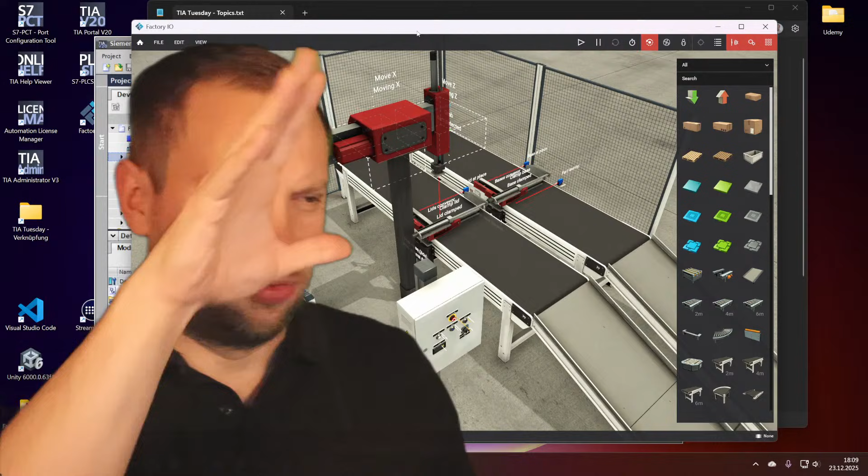I am not a closed loop control master, but this definitely sounds like - the question is, when you start up your controller, your output directly jumps to the max here, right? So your output is directly at a maximum value. If it starts at the maximum value, there could be many reasons, but the main one I could imagine...

So you have the behavior, right? You have two inputs - you have your set point and you have your feedback value, which I'll call FB or 'in'. Let's actually say 'in' there. I will be back with chat in a second, I will try to answer questions today, a little bit.

So now, depending on what you have set your controller to, my assumption is you have set it to a full PID, but the important part here would already be the P. For the beginning, if you start up, the only really relevant thing is the P. Of course the D as well. Try to turn off the D factor, which could break everything. But if you go slowly, slowly also means P and I mostly.

So let's see, if that is the case, and your output is at max from the beginning on, and then as soon as your input is higher than your set point, it starts dropping. Kind of the opposite behavior, right? It's kind of the opposite behavior.

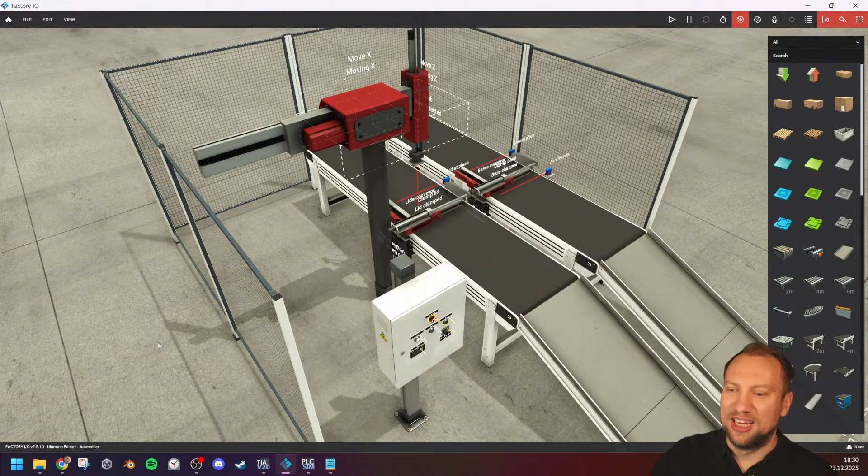Okay, shall we do some basic programming here? Let's go in there. I have this machine. Let's actually program a little bit of TIA today. It's just how would I approach a project? Maybe we can finish this thing today. What would I do? I will sit down for this, which I rarely do for TIA Tuesday - Tuesdays I rarely sit down. But if I'm just going to do a little bit of programming, I'm going to sit down.

Love from Bangladesh. Love back from Germany. Thanks for joining in. Hey Gordon, hi, how are you doing?

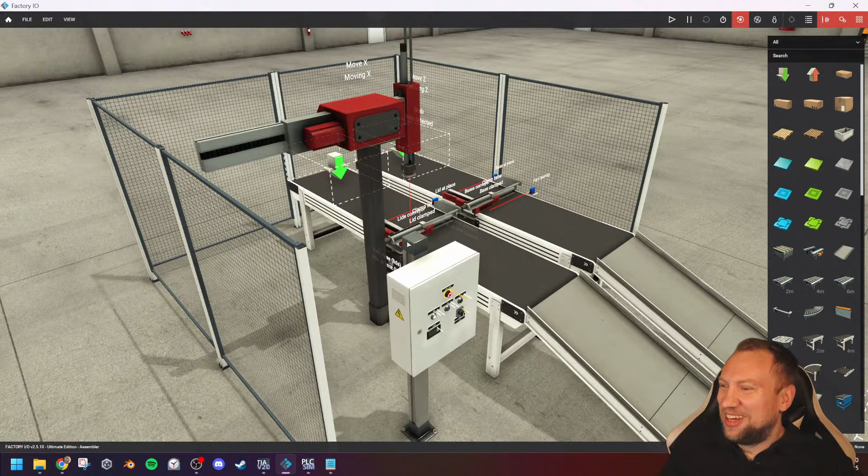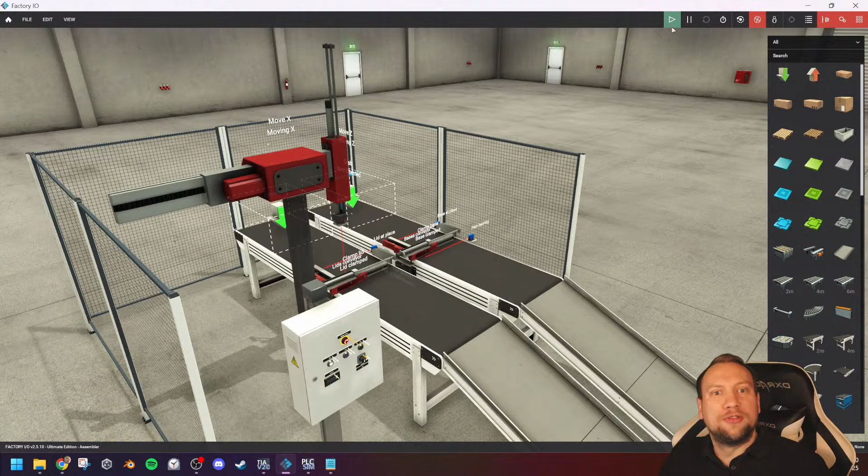So, just some chill programming. If you have questions, toss them in the chat. What I want to do is I want to have just this machine here, very simple. I don't even know what it does, I gotta admit. I literally don't know. I just open it. I think I've worked with this previously, but what does it do?

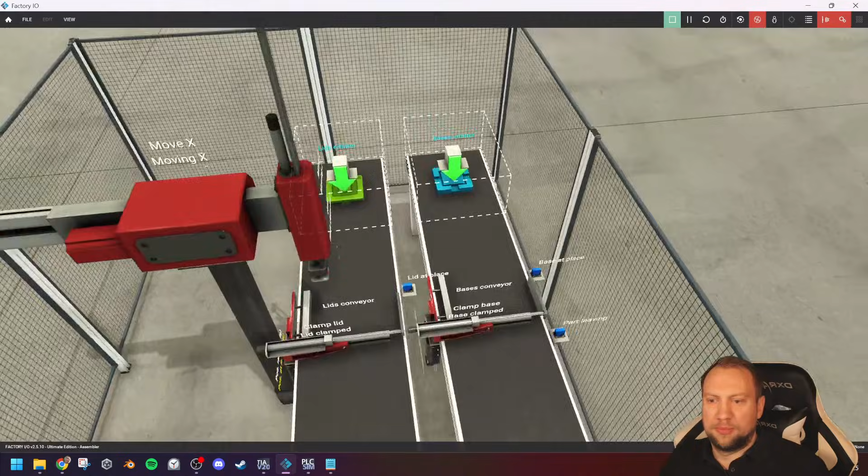Oh I see, so what it does is it has those tops, right? The top goes here, the bottom goes there, and the top needs to be put on the bottom. And then it needs to be transported all the way over here. Now one question that I have: why can this lift here? The top doesn't even - the clamp can be lifted, can it? I think it can be lifted. This is an unnecessary actuator here. But okay, I'll accept it.

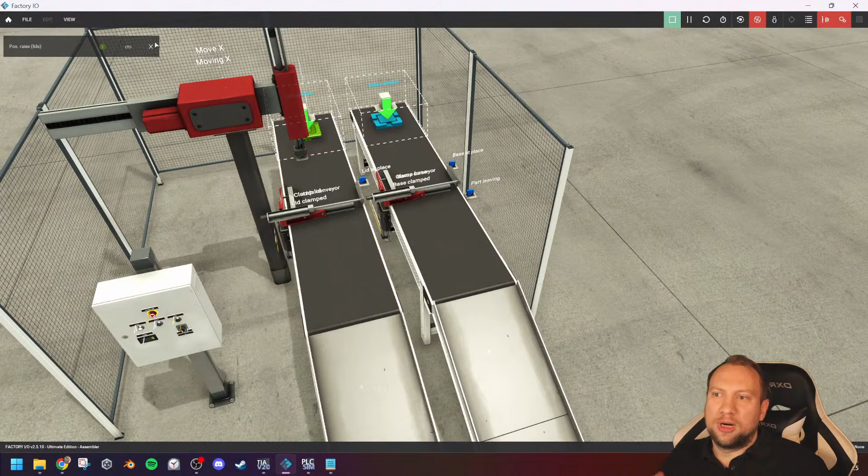So what would I do when it comes to programming? Well, I would first analyze the whole thing and then I would just go for it. Of course here for analyzing it, I would also have this PLC sim. I want to hook this up, and you see it has a couple of inputs, a couple of outputs. Maybe I can program the whole thing in a minute here. We've got an hour approximately, so I can definitely do this, hopefully.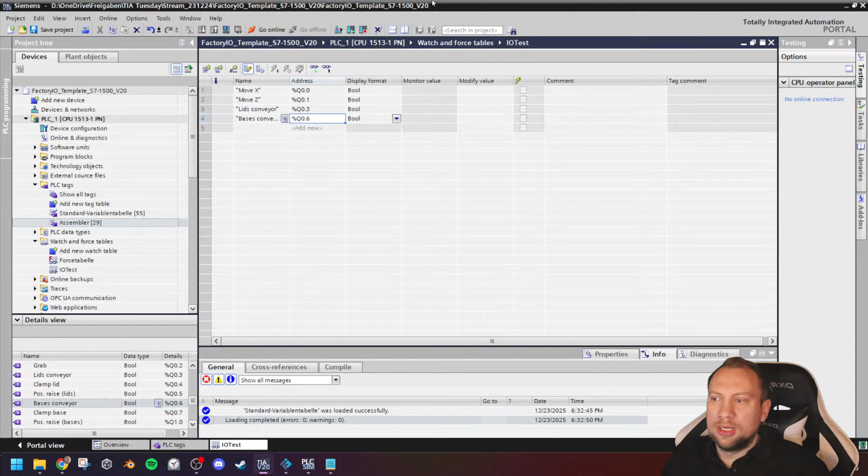Right, so I just have my IO list. I don't need to download anything, this is just on my PC. That's really a great thing about watch tables, they just sit on the PC, and if they work, they work. If everything works, no need to download.

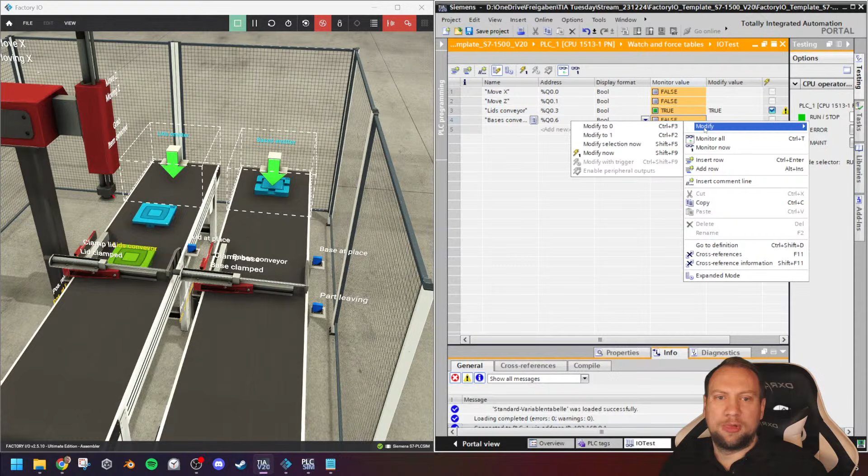So I can turn on and off things. My favorite way is very simple, just right mouse button, and let's see if something happens. So I do have my lids conveyor, let's turn that on, modify to true, and let's see if the connection works. Yep, seems to be good. Bases conveyor, yep, seems good. Right, so that works just fine.

Okay, first thing done, IO test. It's pretty much, this was just an output test, but the test succeeded.

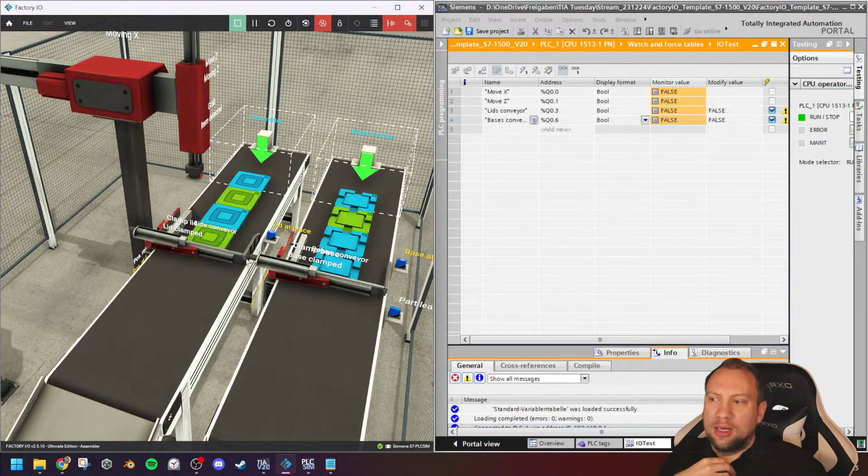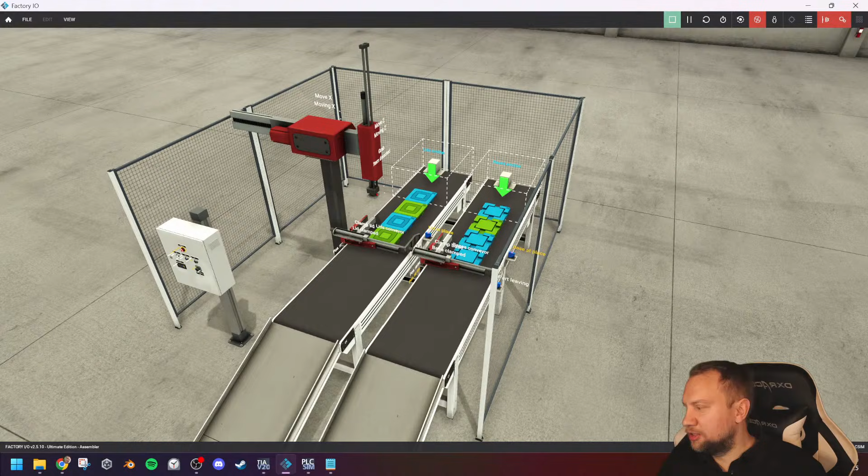Then the next thing that we would probably look at is how would we organize our system here, how would we structure our system? And for this, for structuring my system, I will do something that I haven't really talked about yet, but I will talk about now.

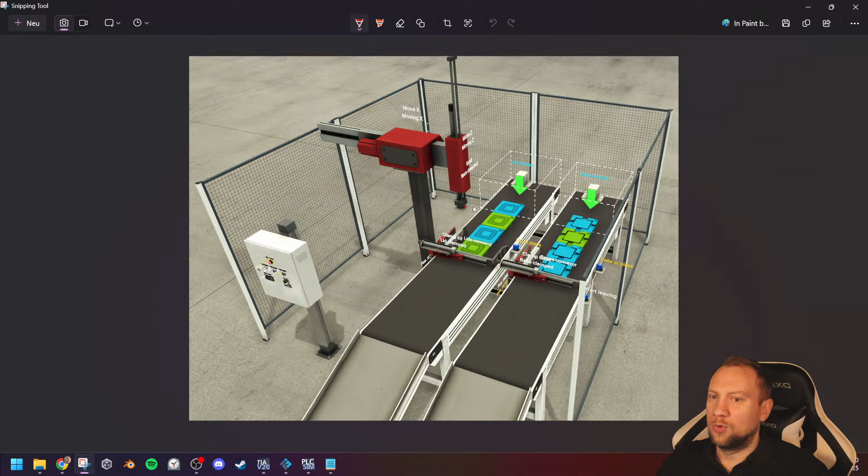JQ is new on the channel, has just discovered me and wants to ask what I'm doing. Is this a high level question, like what are you even doing? I understand it as probably for a job. As I said, today is more of an AMA, right, I'm going to discuss, talk to you, ask me anything. For those that don't know what AMA is, ask me anything. You can ask, of course. I am an instructor for all kinds of programming things, I'm a teacher, I would say. Yeah, that's it, pretty much. I do have my little YouTube corner here and such, but most of the time I do trainings, I teach. A lot of times, of course, TIA, but also other things.

Let's see, D worked in Masterdrives MC last week. I haven't worked with that, but it's good if it feels right.

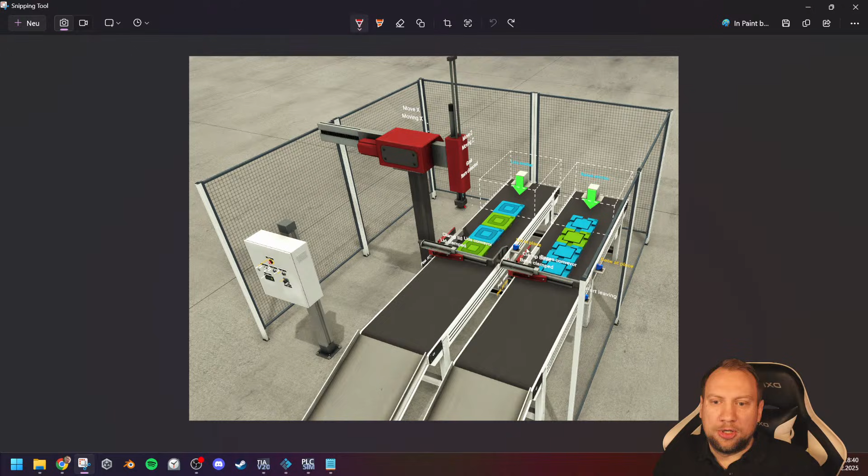That is fantastic. So now, what we can do is we can structure our system. And therefore, I will use some stuff that might be new here. So, for example, what we can structure, and I'm making this up right now. I know what I'm doing, but I'm making kind of the structure up here. So what I want to do is, we do have, for example, two conveyor belts, right? This conveyor belt, this conveyor belt, 1 and 2 conveyor belts. Now, what I will do with those is I'm going to have them in my own kind of structure. Right now, what they are is they are completely separate. Not just the conveyors are separate, but each component is treated as a separate component here in the system. So what I will be doing is I will have one tag that is conveyor 1 and one tag that is conveyor 2, which makes it much easier to work with the whole thing.

Mark asks if I'm a trainer for Siemens SITRAIN. I am self-employed, so strictly speaking, no, I am my own, but I do SITRAIN trainings, yes. Right, so if you ever go to a Siemens training, I might be your trainer. I've had this in the past quite a bit, that people went to a SITRAIN training and met me and they were like, hey, I know you. And it's always very awkward for me. So please, if you ever meet me in a training, of course say that, but be aware it is like, oh god. I've also had times where I was at the Siemens Training Center and people approached me like, can I take a picture? And I'm like, hey, of course, yes, why not, sure, take a picture. It's not awkward at all, I'm having fun, but it's, yeah. But officially, I do SITRAIN trainings, yes.

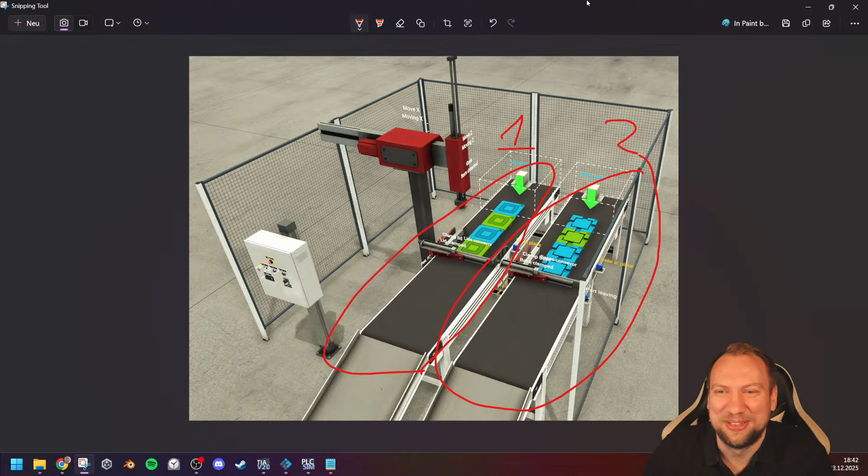So I want to have the structure of conveyors. Because we already have 2, I want to keep them together.

You would love to meet me. As I said, you can go to Siemens SITRAIN trainings, maybe I'll be there. Sometimes in person, sometimes online, who knows? I might meet all of you at some point.

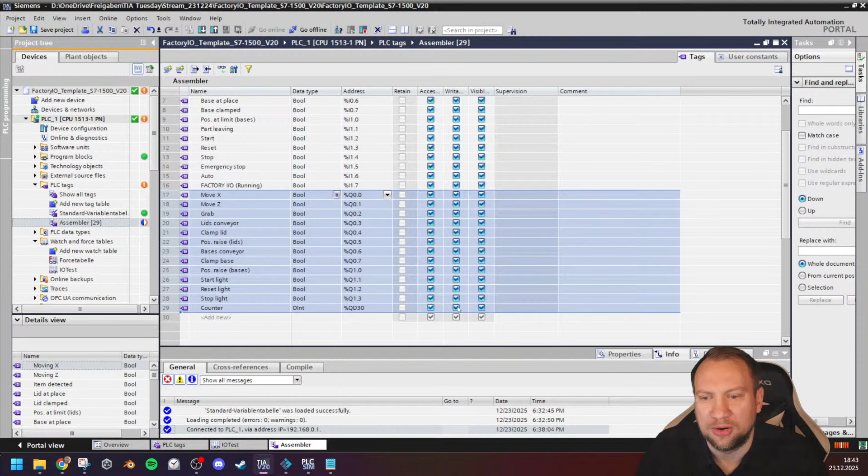Now what I would do is keep things together. I'll have my conveyor out 1 and conveyor out 2 combined. I don't know what is the conveyor here, this is kind of unorganized, and it really is. So let's make this session quite useful. In the best case this would be organized differently, and I will do so. Let's actually do something that makes much more sense.

For this, I'm going to change my configuration here, I will have more. Why do I have 12 outputs? If nothing works in the end, it's not about anything working today, it's fine if it doesn't. So let's actually do 3 output bytes. And I will slightly reorganize here.

What you would usually find is gaps in your addresses. So why would I want gaps in my addresses? Well, I want to keep together what belongs together. So I want to have everything that goes together for my base conveyor, together. The same I want to have for my other stuff, for the lids conveyor, for example.

And I will need to reorganize things here a little bit. Oh my goodness, this starts to be strange then. Lids conveyor, clamp lid, and pos raise lids. Right, so right now output byte 1 is for my lids conveyor, output byte 2 is for my bases conveyor.

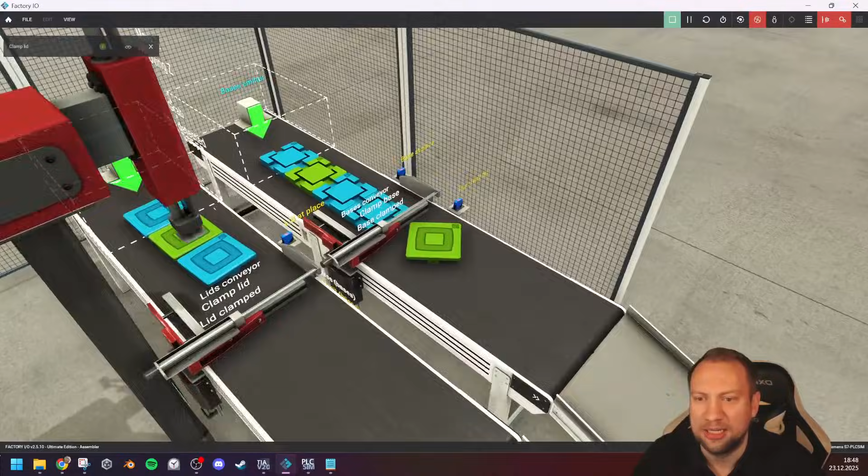Where is my IO list? So bases conveyor, part leaving. There we go. So organizing my IOs, it's important.

What does lid referring to? Lid is like the thing that goes on top. You have bases here on the right side and you have lids on the left side, right? And the lid goes on the base. That's the lid now.

So Anton asked if I'm planning to make training videos on drive simulation. Maybe a little bit, but not too much. I'm not a drives expert myself. So I know my competencies. Drives is not one of them.

Okay, now almost have everything sorted here. I will still reorganize a little bit. I will probably have to put on my headphones at some point because my girlfriend is in the kitchen and she's yelling right now. I'm like, oh God, I'm not going to help. I'm sorry, but no. But still I hear her cussing.

Can I please explain about Failsafe PLCs? So D asks, can I explain about Failsafe PLCs? As I said, today is more of an AMA session. Yes, very quick. Right, where is my paint?

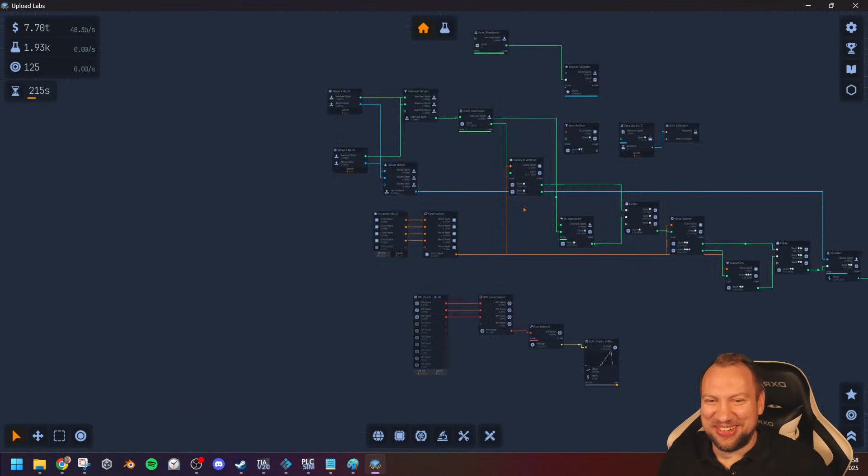So they get checksum verified, thank you very much for reminding me. I'm going to turn the sound off and have this running on my second screen. Mute everything please, thank you. There we go, very nice little game, I started with this today. That's why I mentioned it, how's it called, Upload Labs, very fun game.

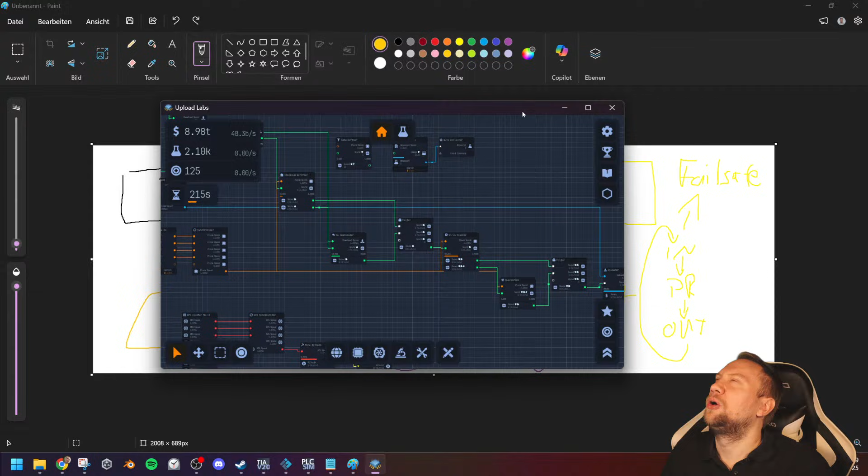Hans asked if TIA Portal works on Mac OS. Not as far as I know. I don't even know if you can run it on a virtual machine since it's hardware dependent. I forgot the framework it uses in the background, but it relies on Windows, so you cannot directly install it on Mac. Maybe you can find a workaround with some virtual machine magic, but I'm a Windows guy, so I don't know, I wouldn't recommend it. What I can officially say is that TIA Portal has no official distribution for Mac.

There we go. Okay, perfect. So I still have my I/O set up here, which I will have to re-import in a second.

Now that we talked about fail-safe hardware, there is an emergency stop input here. This emergency stop input is absolutely illegal in this way. This depends on country, but we talked about fail-safe. If I have something that I call emergency stop, and all it does is connect into a normal input, into a normal PLC, into my normally written program, and I use it in my program, it should turn off things in my program.

However, if I call it emergency stop, and I have it in my normal program and something fails - and this thing can fail, it's not a fail-safe setup, it's a normal thing that I called emergency stop - if this fails now and someone gets hurt in the process, I am 100% liable as a machine designer. I will probably serve some jail time, and for good reason, because I have said yes, the system uses emergency stop, but this is not an emergency stop.

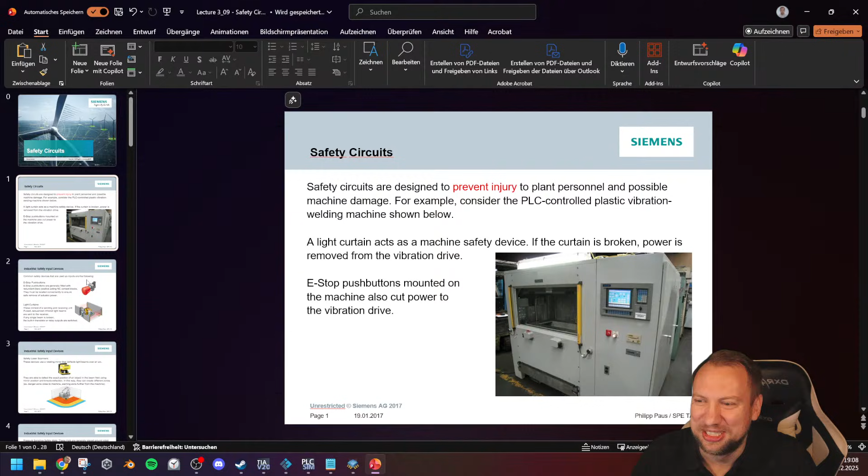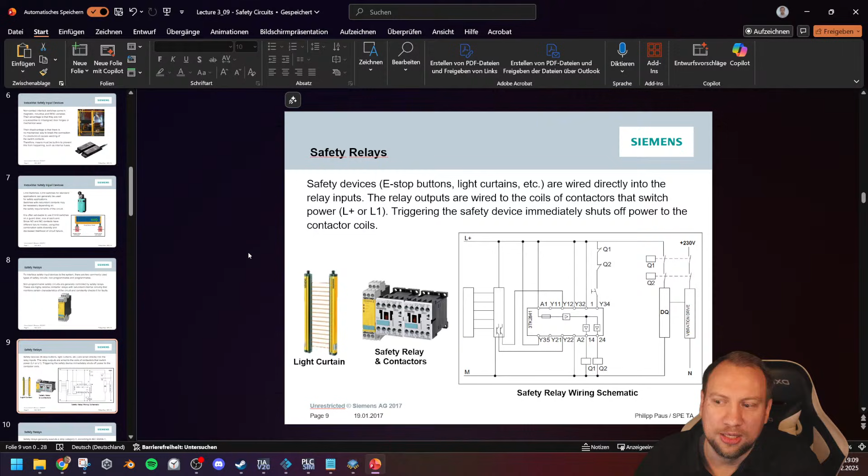So I do have a PowerPoint slide here that I used in official Siemens classes about safety hardware. We have many different safety hardwares, right? And the question was, hey, those are usually normally closed — you are correct, but you're also incorrect. You are correct in that safety hardware usually uses normally closed contacts.

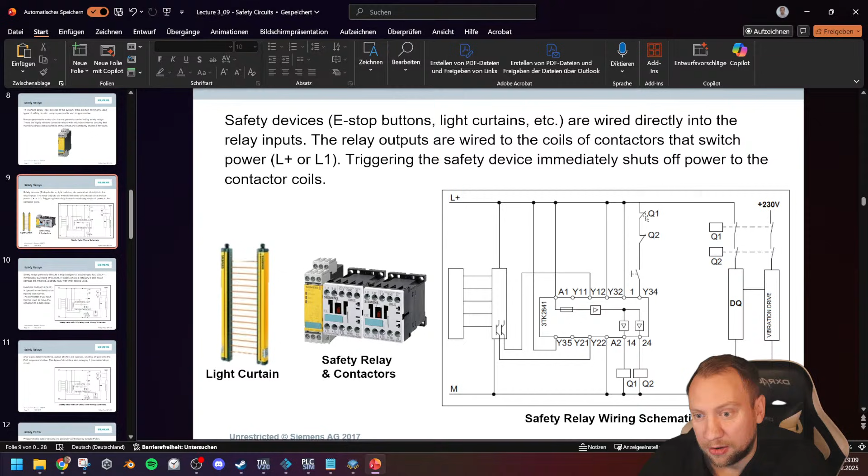However, that is not enough. If you have an emergency stop, for example, or any emergency hardware components, they are usually wired not like this, which you would expect. This is not an emergency stop — if you see the wiring here, electrical classes, I love it. You have the e-stop as normally closed in series here, and then it can turn stuff off. This is not an e-stop, this is a stop, stop category 0. If I press this, it turns off power, category 0.

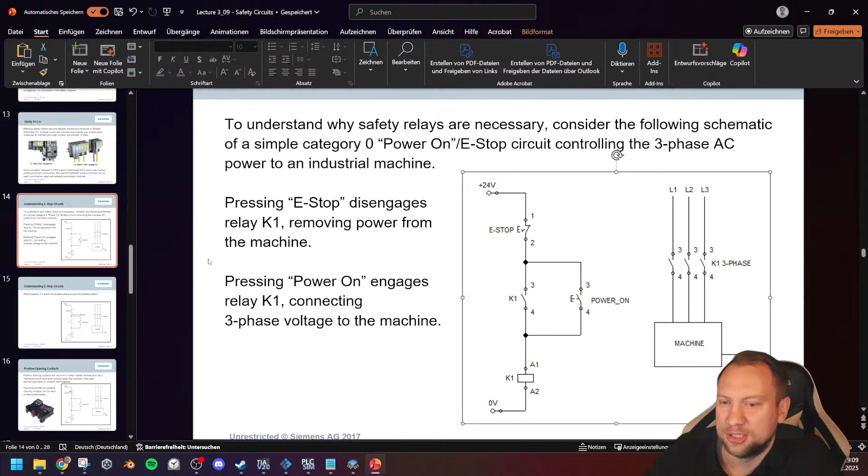What we would need to do with this is protect it against many different problems that could occur. The first problem is if this thing fails itself, physically, mechanically — so we have a second contact. If you hit an emergency stop, you're not disconnecting one contact, you're actually disconnecting two contacts, in series inside of the device itself. So even if the contact solders shut, or is broken off physically, you still have a redundant one.

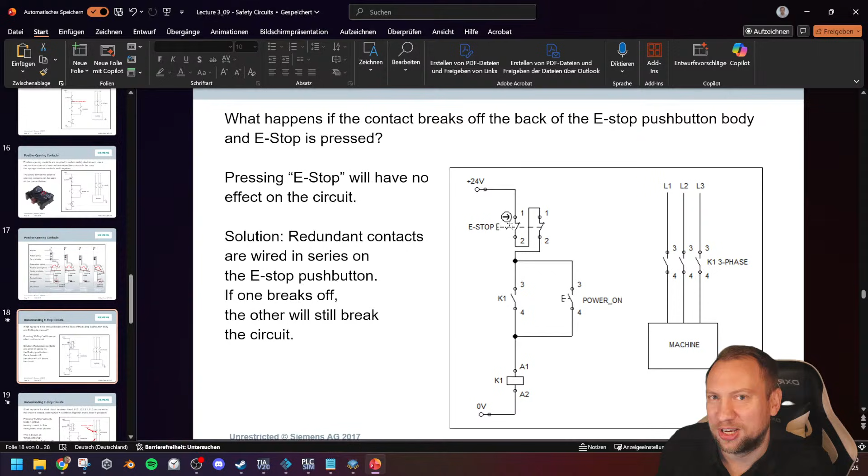Second thing is they are forced opening — if you press the button, it literally breaks open something on the inside. Emergency stop buttons are not for you to press, press, press, press — they're going to break at some point, highly not recommended because there's a lot of force acting inside of them. And then of course there are many more levels to emergency stop. You see how many iterations I have here on the same circuit to make it fail-safe. What you would do is use some fail-safe hardware or a fail-safe CPU that takes care of so many different problems we have when we talk about safety in machines. It is not just a push button, it's way, way, way more than that.

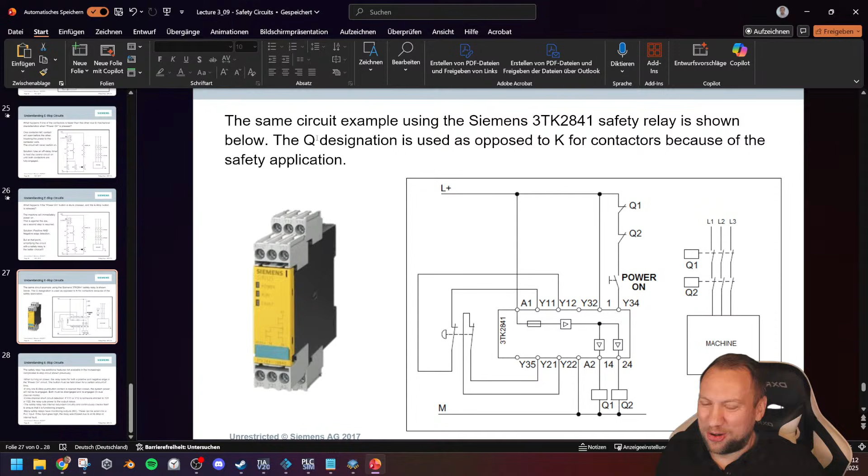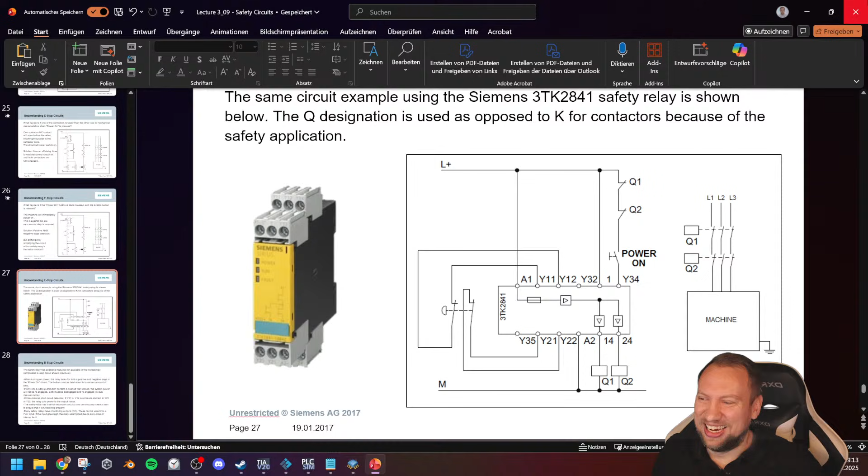Daryl asks if my PowerPoints are available. No, I can't use those in any other content. As I said, I have many things that I cannot share publicly. I'm probably not even supposed to show this, but it's been such a long time that I've used this, the school doesn't even exist anymore. So I'm closing this up.

Yusuf says, hello master, I'm an electrical engineer from Turkey, offer you my endless thanks. You're very, very welcome, thank you for watching them, thanks for enjoying them.

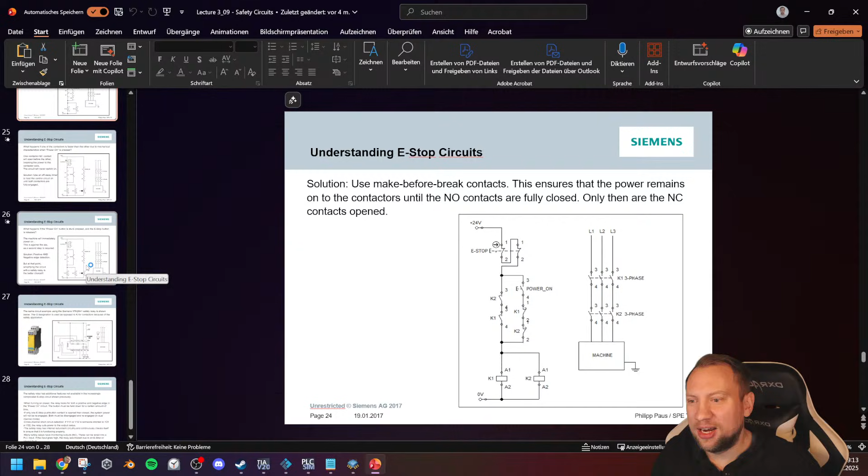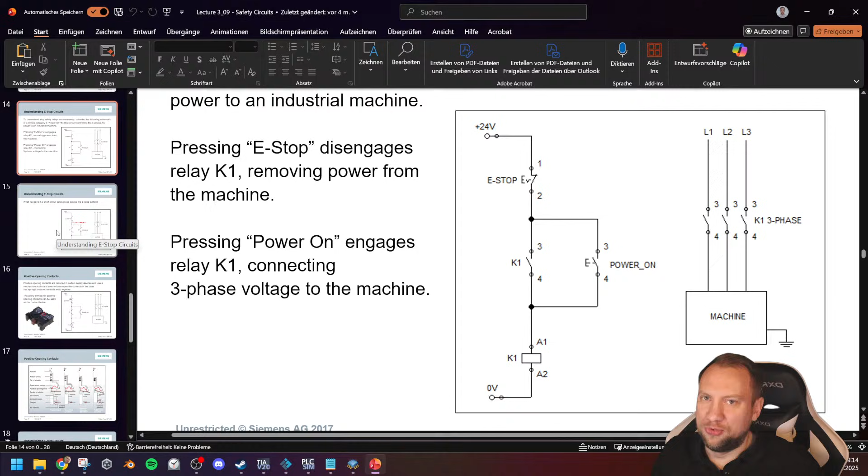So because I know wiring of the stop button is the same: if your stop button is wired the same way as an emergency stop button, it is not an emergency stop button. It really is as simple as that. An emergency stop button uses emergency stop circuits. You cannot have, well, as I said, this here is the first iteration of this. This here is a stop button. Electrically seen, if this button is activated, your power will switch off. If you really need to have an emergency stop circuit, the least you would have to do is implement many more safety mechanisms or use safety hardware. If you have an emergency stop button and you do not have emergency stop relays, you're kind of not doing it 100% correct. For those emergency stop relays, just search for emergency stop relays and those things will come up.

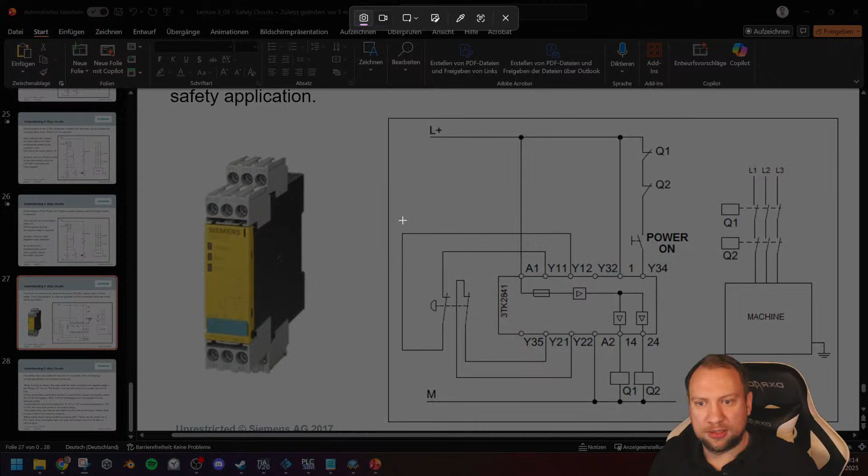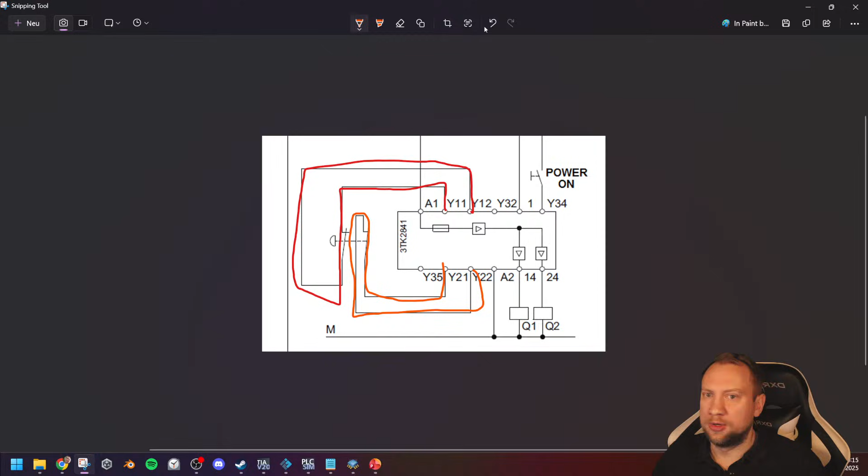Because an e-stop as well, if I look at this, so this is how the e-stop is wired here. It has two circuits, this one, and this is just an example. Those two circuits are permanently monitored for a short circuit, for error currents, for ground fault indications, for clamping of those lines. So even if those wires are clamped a little bit, the thing will shut off. That is what an emergency stop is. Those wires are so extremely protected by this device, they are wired into this device. Your emergency stop is not a normal stop button, by far, right? By far it's not. If it is a normal stop button, you, at least in Germany, would be liable.

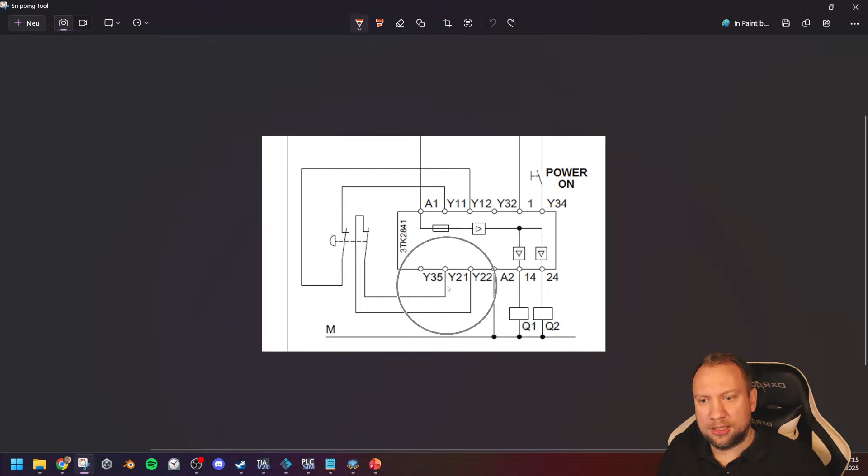If Alexander asked whether it does exist as an input to your PLC, it depends on your program. A lot of those things have a feedback. Usually this feedback, I would not say the feedback goes to your PLC from the button itself. The feedback comes from your emergency stop relay system. So this one has an output to connect to your PLC. So you would not have the emergency stop button, but you would have the emergency relay system as an input.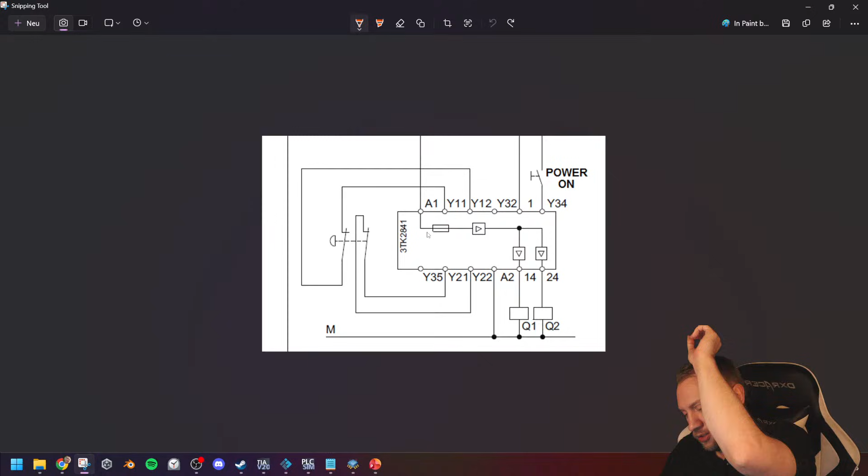Kapal also says, yes, it's also a control mix between channel A and B. Yes, yes, there is a lot of things going on. Emergency stop is a huge topic in itself. But of course, this could have an impact, like if we press this, usually your PLC program would react to this with an input. But that's your standard program. That would be a standard program on one side, but your failsafe program, this stuff, it's not even a program, right? This right now is literally hardware.

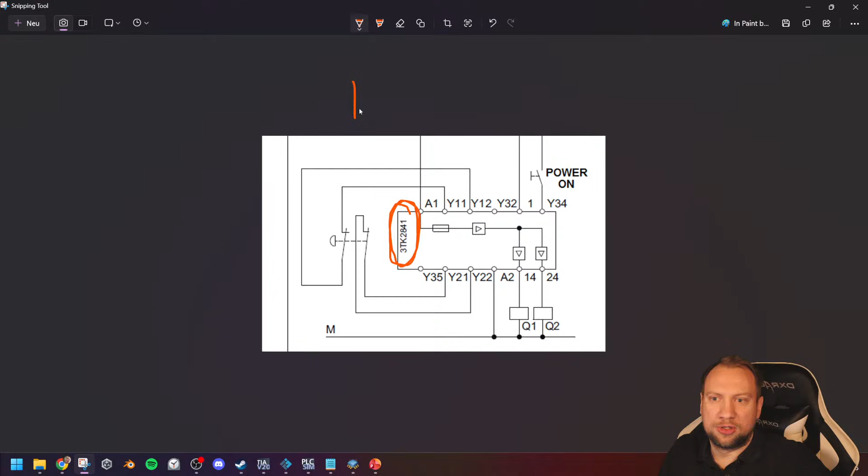Does an addressable safety relay exist? Yes, Ramdane, there are many different relays. There are even safety relays that you would connect through Profinet. There is a whole topic about this called Profisafe.

Now I love it that this is now a class about safety, which is an Ask Me Anything session today. So Profisafe itself, right?

You have Profinet. Imagine your Profinet network is slow, or your Ethernet network is slow. There is a delay, maybe 10 milliseconds, maybe 30, maybe 100 milliseconds, but there is a delay. Which, of course, if you have a safety application, it's not safety anymore. You cannot send safety information through a normal network, also not through a normal Profinet network. That is not allowed by law. So if you have a safety application, you cannot use normal networking stuff.

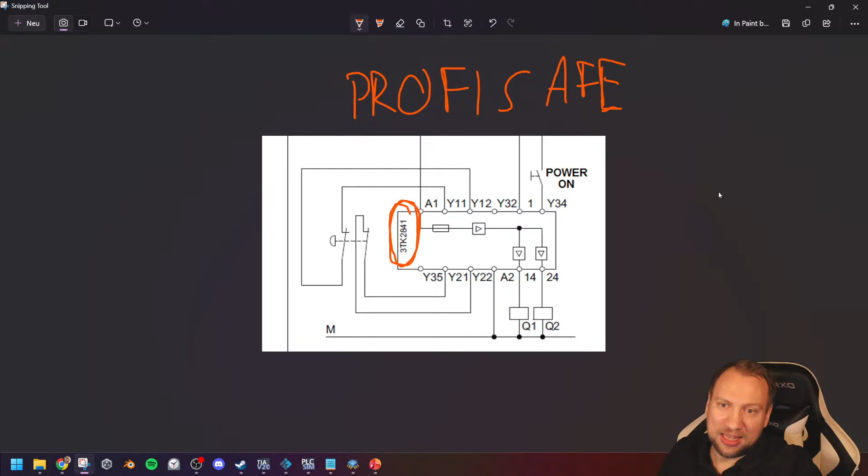What you can do, though, is use specialized hardware, which is Profisafe hardware. Profisafe hardware uses Profinet, and you can connect things like an emergency stop through Profinet, but you have to use the Profisafe protocol for it, which is very difficult. It's a topic in itself. Which is also like addressable safety relay.

That's how I got there. Yes, addressable, yes, but you will have to use different standards. If you have a Profinet network and you want to connect a safety relay or an emergency stop in your Profinet network, you have to use Profisafe. Or it's not an emergency stop anymore. You will still say, hey, I have an emergency stop, but if you're using normal Profinet, you do not have a real emergency stop anymore. You have a glorified stop button, but you don't have a real emergency stop. If you have a real emergency stop, addressable through networks, Profisafe is the idea here.

Someone says they have problems with installing TIA Portal on Windows 11. Does anyone have that issue? Are you installing it on Windows 11 Home or Professional? I know that there are many problems with the Home edition of Windows 11.

I also had some problems with TIA version 20 some time ago. Try updating your Windows, that might help. But if it's Home Edition... oh, it's Professional. Professional should not have a problem at all, should be fine. Maybe you have to run the installation in administrator mode - that's what I usually have to do. The problem I have sometimes is admin mode is not active. It can work on Home Edition, but on Pro it definitely works. Strange, try in administrator mode.

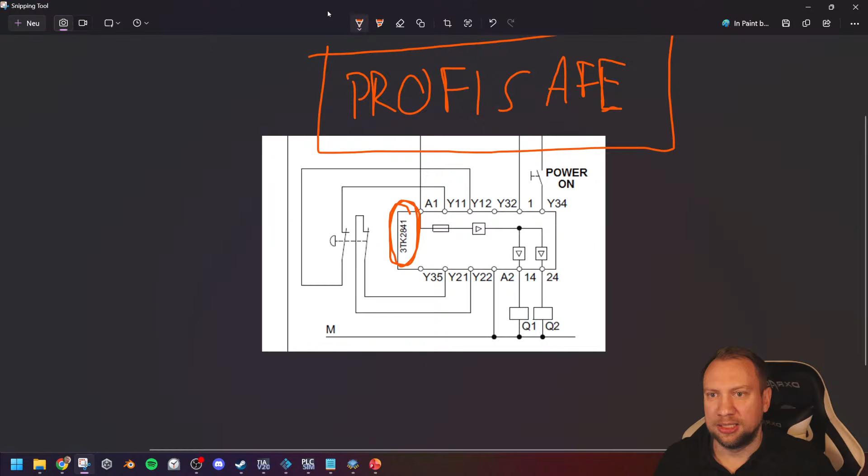Oh, that is actually a simple question, a simple answer there, D. It's the same reason. So basically D asks, usually those are normally closed - why are they normally closed? Well, not simple, but the answer is here. Let me make a new paint canvas. Do I have paint still open? No, does someone see paint? No paint. Right, so why is your safety stuff always normally closed? It's actually quite simple. If you have a push button...

Go safe, not cheap, yeah, that's the thing. A lot of people go cheap, and maybe nothing happens in 40 years, which I wish for everyone, but safety is like you're paying for the one moment where something goes wrong.

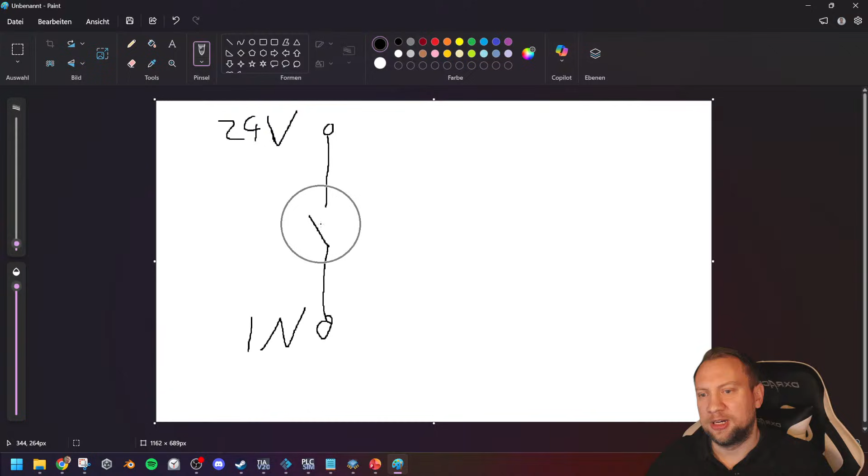So, very simple thing here. This is now a short, this is your input, this is your PLC in. Now if you press this button - and I'm using the German annotation, there's different things - this is a push button for me. If you press this, this thing will be activated, and now it is closed, and now your input will read 24 volts, right?

Now why would you use a normally closed instead? Imagine a wire breaks, there is an open wire here, this wire is now broken. So even if you press the button, what is your PLC going to read? The button is not pressed. So the PLC cannot differentiate between pressing a button and not pressing a button anymore for a normally open contact. So normally open, the button will just count as not pressed the whole time, even if you press it. Now if you have a stop button and you have a broken wire, how should the system react?

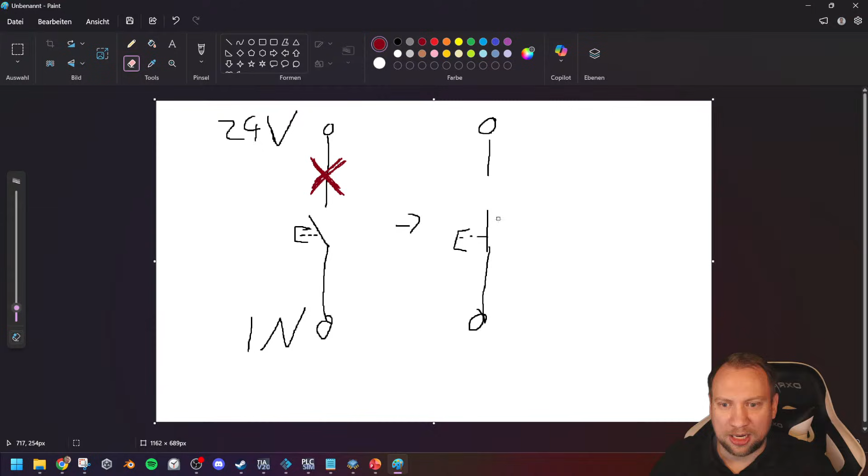The system for a stop button should react the opposite for a start button. For the start button, the system should react that the button is not pressed. Don't start, don't start, don't start - even if you press the button, it's not going to start, right? Now if you have a normally closed... and now we are kind of in the basics there, but that's perfect, right? As I said, I'm going through questions there.

Now if you have an NC, why would you have an NC, which looks like this for me? Now for an NC, if you press the button, it's going to open up. Or if the wire is broken, the system will think that the button is pressed, which you prefer for a stop button. For a stop button, if a wire is broken, it will think that the button is pressed. That's as simple as it is. That's why we have it - in case of a broken wire.

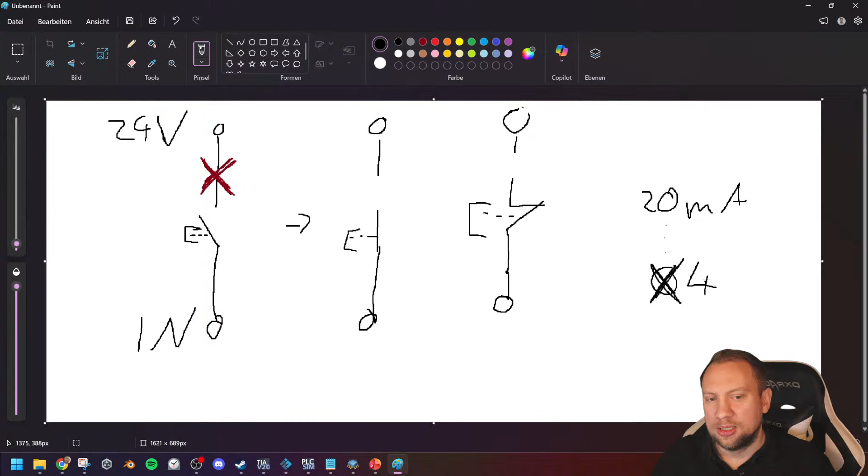The same goes for your analog stuff. That is also why most analog inputs do not go from 0 to 20 milliamps - you cannot detect a broken wire on 0 to 20 milliamps. Usually your analog inputs will go from 4 to 20 milliamps. So in case of a broken wire, the module will detect we have 0 milliamps, meaning we are broken. That is why you have this kind of 4 there. Yeah, we typically call this failsafe wiring. Exactly, it's failsafe wiring.

Yeah, exactly, that's the whole thing. Yeah, thank you very much. Yeah, in different languages even.

What is an automation engineer's salary in Germany, Ahmed asks. Good question, I don't know, I'm self-employed. I could tell you how much money I make, but I will not. In Germany we don't talk about money too much, which is wrong - I would say that is wrong in our society. But yeah, now you understand. You're very welcome. Perfect, then I have made my good deed of the day.

Yeah. I will not tell you how much I make.

It depends on many things, but I would say the hourly wage could be approximately 100 euros or so. If you would ask me to help with a project, I would probably take around 150 to 200 euros, which sounds a lot per hour. But I'm self-employed, that would include my manager, that would include my taxes, the income tax, and so on. So that's not what I would be getting.

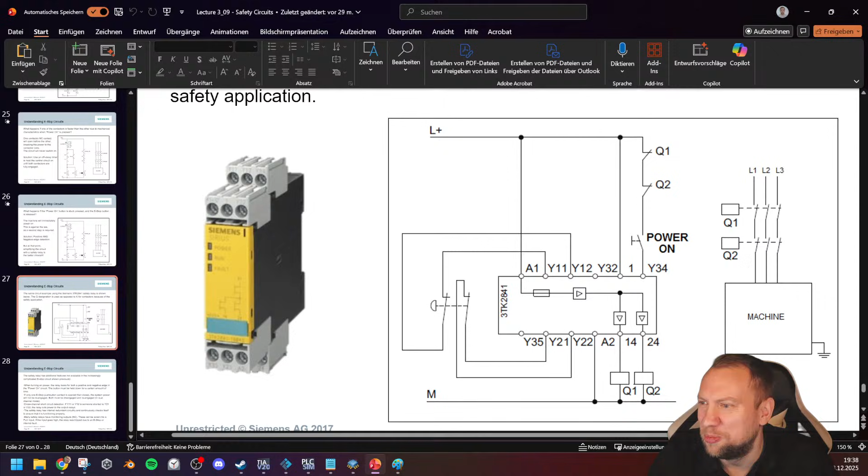Why can't we use OPC-UA with VFDs like Profibus, Profinet, or Modbus? Probably in the future we can, but right now that's just not how VFDs are set up, they use their Profi Drive protocol. OPC-UA is still fresh, it can probably be set up to work with a VFD, but not that I've seen it.

Do I plan on making a playlist about motion control? I think I have a motion control playlist, but inside TIA portal.

Are chemical plants rather DCS controlled than PLCs? Depends, but if you have chemical control plants, you would probably go with an S7-400, not TIA portal but PCS Neo systems, more process control systems, but can be PLCs as well.

Jose says there are PLC programmers in the US that make only $40. Depends, there's a whole range, right? As I said, especially as an entry, I would take probably 150 or 200 euros, because I act as a company. What I mean is, what you pay someone to do, you're usually not paying one person. If you're a company with an employee, that employee gets paid an hourly wage, but if you need a company to do something for you, they have an engineer, but they also have the whole overhead costs you have to pay for, so you're paying way more. Probably an engineer hour is like 150 euros. What does an engineer hour cost?

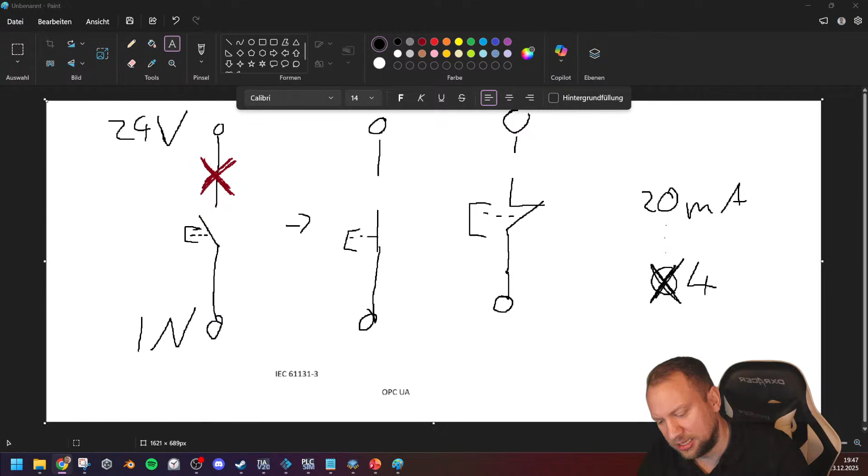Where can I get a job as a PLC software engineer with C++? I would look up on Google, on Monster - we have many websites. I think in Germany the most famous websites for getting jobs are Stepstone. My recommendation is I would look up on Stepstone, there are a lot of jobs there. That's in Germany, I can only speak for German - Stepstone is a German website. Then we have Monster.

Monster or Jobware - did they change the name? They probably did. No, Monster is still there, Monster for jobs. And then there's what is very powerful - it's actually LinkedIn. Through LinkedIn you can find a lot of jobs. In Germany this is the official place where a lot of professionals search for jobs - it's your social network for jobs, more I would say. Those would be my three sources: Stepstone, LinkedIn, and Monster.

I'm not using it too much myself, I'm not searching for work too much. I do have a lot of industrial contacts - personally I have different sources, but as a newbie, that's what I would try to do.

That was not correct - it said my IP, but it tried to dox me, that was not correct. I love the internet, how it never really works.

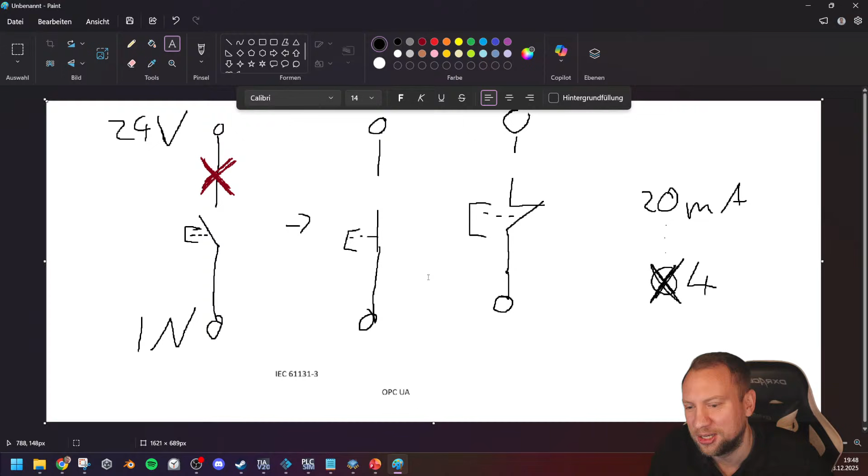Can HMI also read emails and do something in the PLC? Yes, Masood - PLCs have an email feature which you can use, and you can also connect that to your PLC in your network. Hey, I haven't used that.

Now it's been almost 2 hours and I've just been talking. This is fun, this is great actually, just talking for now. That's what I planned for today, right?

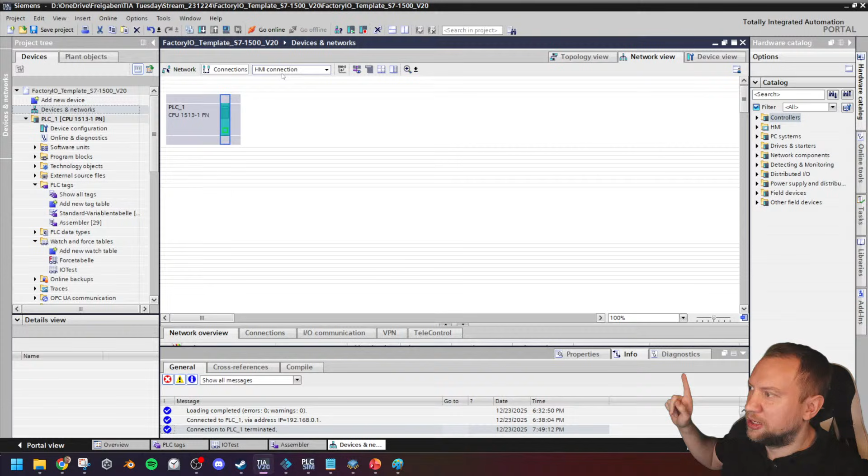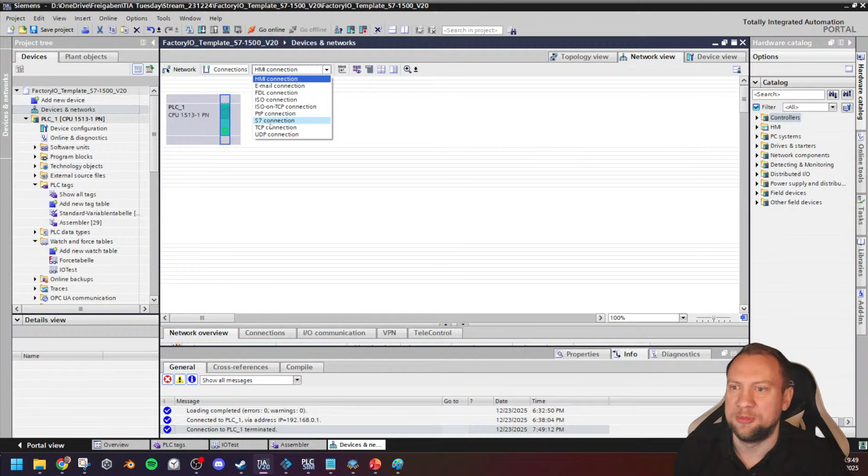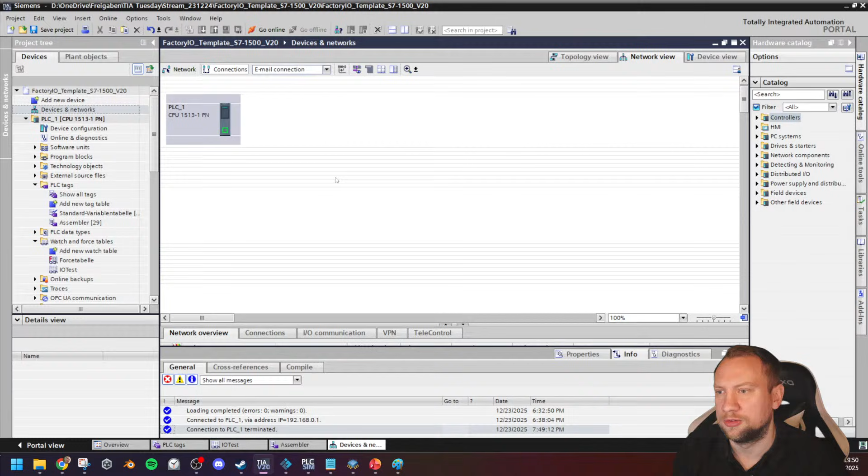Now who asked - Mahmoud, I think, right? Or no, Masood asked there. You see this - if you have a PLC, it has connections, there is even an email connection. You can set up easily with TIA Portal a so-called email connection to a server, and the PLC can then work with emails in the same way an HMI also can. I can't show how to set this up right now, but yes, this feature exists and isn't too difficult. By the way, the same goes for PLC connection, which might be an S7 connection for example - or maybe TCP or UDP connection, but those are for data connection. Then you have HMI email connection, which you can set up for HMIs and for servers, not for PLCs directly. For PLCs you would need the program block - there is a program block for email. I haven't used it, but I know it exists.

Technology communication - is there something like a mail server? Web server is not a mail server. Others? Modbus, communication processors. Wasn't there like an email function? Send email, receive email, stuff you can do, but I haven't done that. But I know it can be done.

Summer asks, can I work as an automation engineer in Germany without speaking German? I don't know the job landscape in Germany too well right now. I would say it would be difficult, especially as an engineer. I think it is still very important that you do stuff in German, for many reasons. One big reason is that all the documentation, everything has to be in German.

We have laws, we have regulations. There's also the question from Jose asking, do German automation companies hire foreign workers outside of Germany? Yes, definitely they do. They hire staff, but it's difficult for me to say. I know it happens, I know there are sometimes jobs out there. For me, I'm in a different position, so I can't say too much. It is difficult, that's what I can say. Definitely difficult. Future says no lol. I don't know to what, but that's okay.

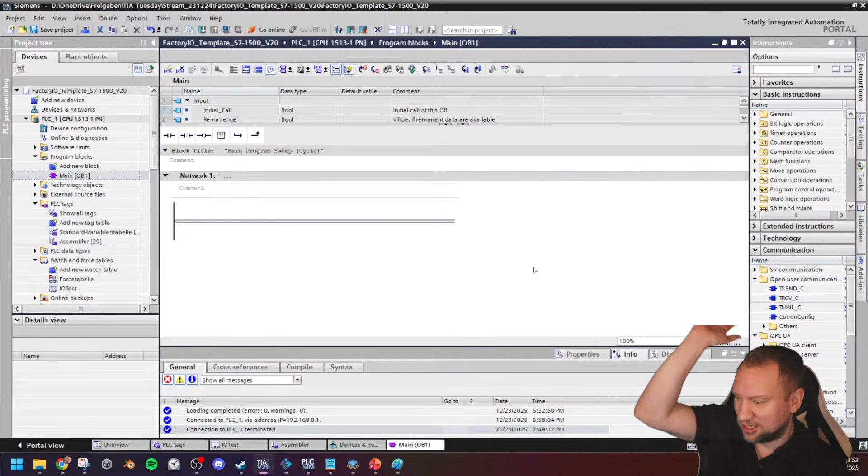Pepper asked, what is the tough part about WinCC Unified in comparison to the legacy system? The tough part for me with WinCC Unified is that way more is with scripting. You will do way more like this because it is web, it's all on web servers, it's all website stuff. You will do much more scripting with like JavaScript and such, which I don't have too much experience in. My girlfriend is way better with this, she does web stuff all day long, she's very good with this, and whenever I have issues with websites she can help. But that's what WinCC Unified kind of is, it's more of a web-based, language-based stuff, which isn't too complex. It's integrated quite well, but that would be my biggest problem with it.

Nima asked, do I work with Siemens? I currently only work with Siemens PLCs. I have the plan to get into others, but that's how life is, we always plan. So, specialize in Siemens.

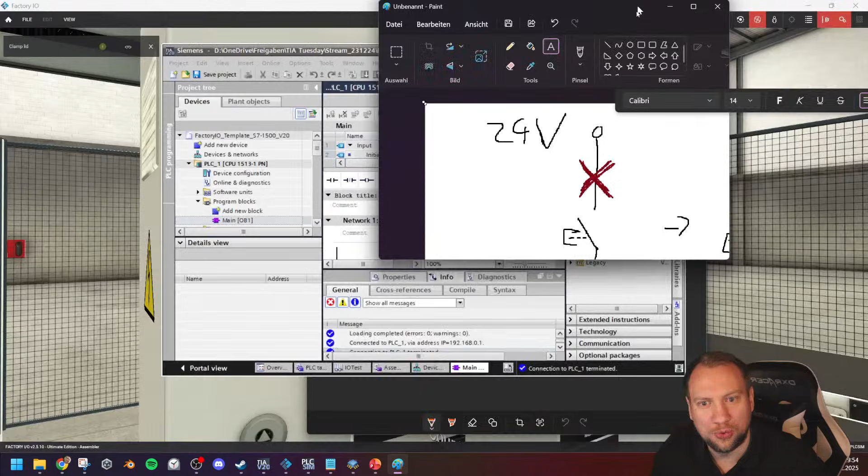But for migration, Ramdane, I can share another link - and this one, whew, I haven't done any programming, fantastic. For the link, wait, let me give you another link, it might take a second. Go on with the chat, I will be back with you in a second here.

Is that English or German? That's even English, look at this. I'm going to give you another free link, this free link that I'm giving you now. Sorry, I'll be back with you in a second there, but Ramdane had the question there.

For migration, this link that I gave you is TIA Portal, an overview of the most important documents and links for the controller. This gives you an overview, and you see there is one big tab here called migration, that's how I got to it. There is definitely like a migration from this controller to that controller or so, there's migration tools, especially for TIA Portal. There is the TIA migration tool, which I can recommend. I haven't used it in some longer time, but still this stuff should help. There's so many different migrations that are possible, but that's the direction I would push you.

What do I think about Siemens AX? I don't like AI stuff too much yet. It is powerful, and automatic code generation will take over in the future, but we'll see. Don't like it yet, but I will have to be prepared for it.

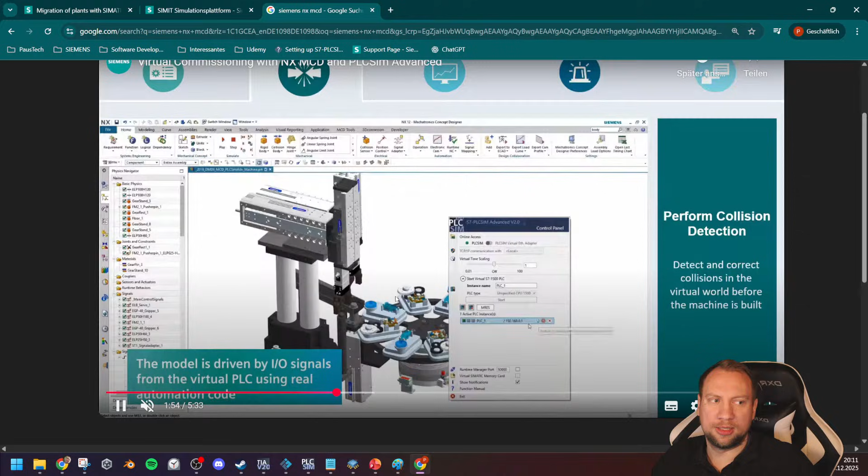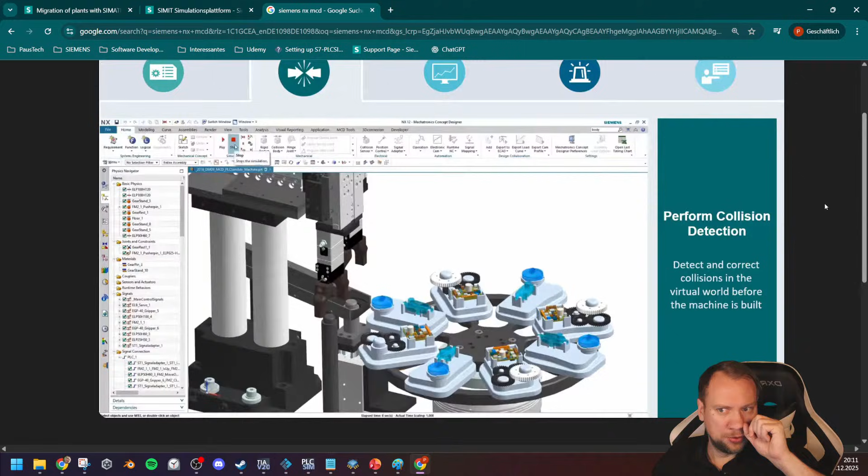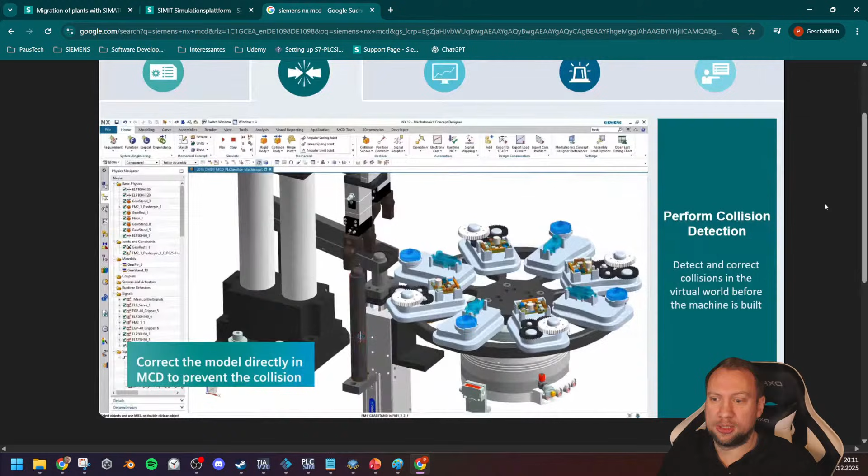I think most industry doesn't need it. It's just a solution to problems that do exist, yes, but in most cases where this can be used, or where people want to use it, it creates more costs than anything else. It is good, virtual commissioning is cool and it definitely is good, but most places I wouldn't recommend it. If you have millions to spare, go for it, perfect for virtual commissioning and stuff. But that's only if you really want to optimize on a very, very deep level.

Yeah, there are advantages, but it's very high level. Too expensive, exactly what I mean. It's nice tools, but too expensive. Siemens has invested billions into those topics to make advancements, and it's good. It has made a lot of advancement and become cheaper, but it still depends. I'm not a business person, but from the business side, it has huge investment and usually not too much return on that investment. From my perspective, but I'm not an expert.

I wouldn't use it, simple as that. I wouldn't use it. I would trust my engineers that they know what they're doing. If it doesn't work in the end, yeah, we'll find a way.

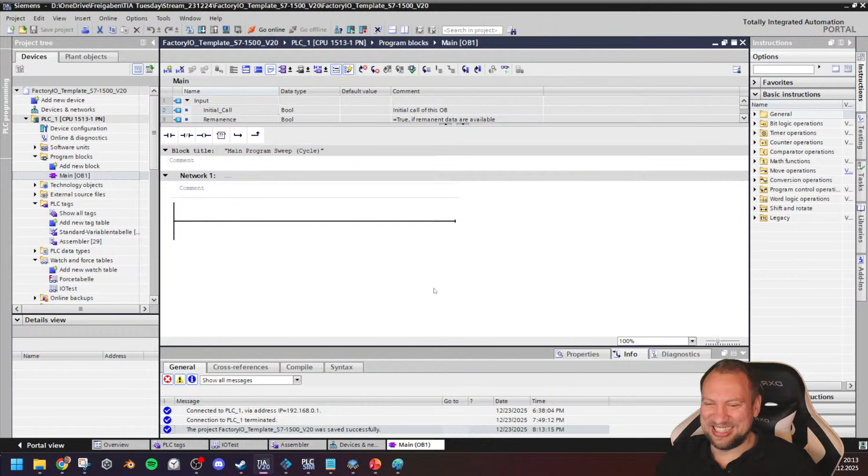There you go, perfect. Look at how much TIA Portal we've done today. Oh god, this was really an Ask Me Anything, and it's now 2 hours already, and I like to keep those streams to 2 hours. Yeah, we haven't done much on the programming side here. Great, I love that I have set this up. I have my IOs, I have kind of started with this, but we didn't finish anything.

But this is good, I really enjoyed this as well. It was more of a like... And I'm not gonna go much above the 2 hours. I didn't think even I would go for 2 hours today because it's so close to Christmas now. But I will now also start fading out here. We haven't done programming today, I'm sorry, but I think this was good. This was like solving a lot of questions, a lot of interaction here.

Thank you very much, really enjoyed reading your questions and answering them as good as I can. You realize I'm also not an expert in everything, no one can be an expert in everything. I try to be up to date with all my stuff, but yeah. No, this was good. Also, reading your questions always gives me new ideas of what is there.

My ears are getting red. No. Are they? Not so much. It didn't feel like it. I can make them go red. You want to see my red? Wait. Now it's getting more red, wait. Zoom, now it's getting red. Why wasn't it red before? But yeah.